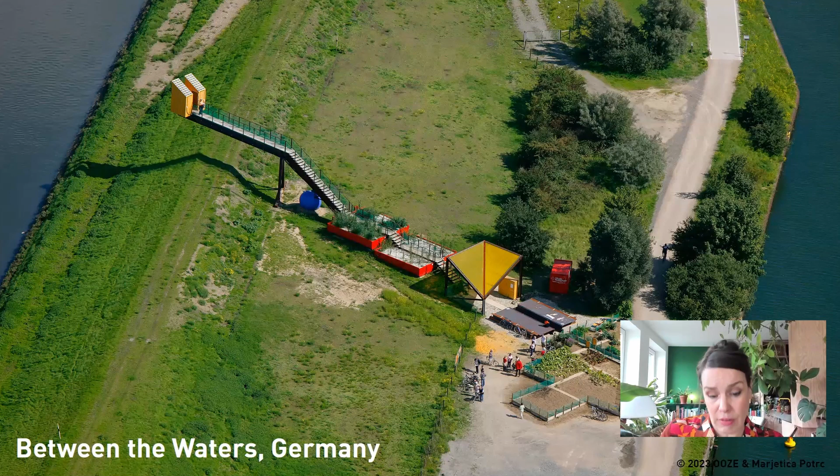And exposes all the elements needed in a diagrammatic way that is beautiful and understandable. We actually brewed beer from the wastewater treated with nature-based solutions, and created a place for the community to come together and enjoy.

And in London, we created, out of soil and water, the King's Cross Pond Club, which is the first public swimming pool without any chemicals, right in the center of the city, surrounded by 80 different wild plant species. 5,000 people signed a petition to keep it.

And you see in front of you here 30 individuals who wrote a letter to the local council committing themselves to actually care for the pool and run it at their own expense.

And now, of course, after this brief array of prototypes, the question is: how do we apply these concepts to a whole city?

I would like to share with you the case study that we're working on since 5 years in Chennai. It's called the City of a Thousand Tanks.

We work together with an amazing group of people, mainly from Chennai in India, a city of 7 million people, and from the Netherlands.

The Dutch government started a program led by the first water envoy, Henk Ovink, called Water as Leverage for Resilient Cities Asia, in 3 different cities in Asia: Chennai in India, Khulna in Bangladesh, and Semarang in Indonesia.

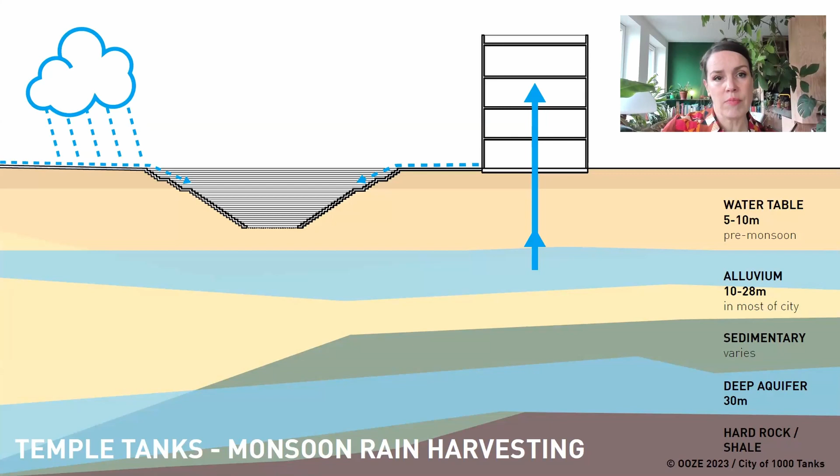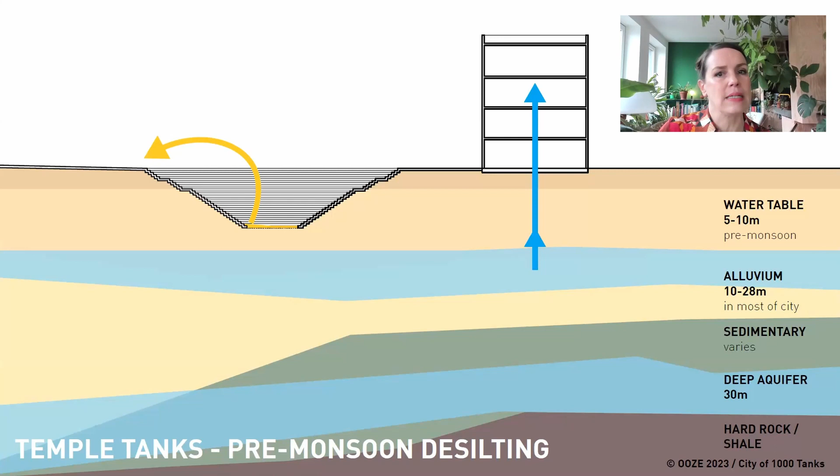So actually constructing places in the countryside, but also in the city, where this water can be absorbed and stored - which is what we call 'solutions in heritage,' which we found when we got into the theme. This here is almost like a temple tank in section - it's almost like an inverted pyramid. It's cut into the ground and allows all the rain water to flow into it, to be stored during the monsoon. Then slowly, over the course of 10 months, it infiltrates into the ground and can be brought up and used with individual bore wells. When it's empty, it can be desilted and cleaned. This has been in place for centuries, but now the system is broken.

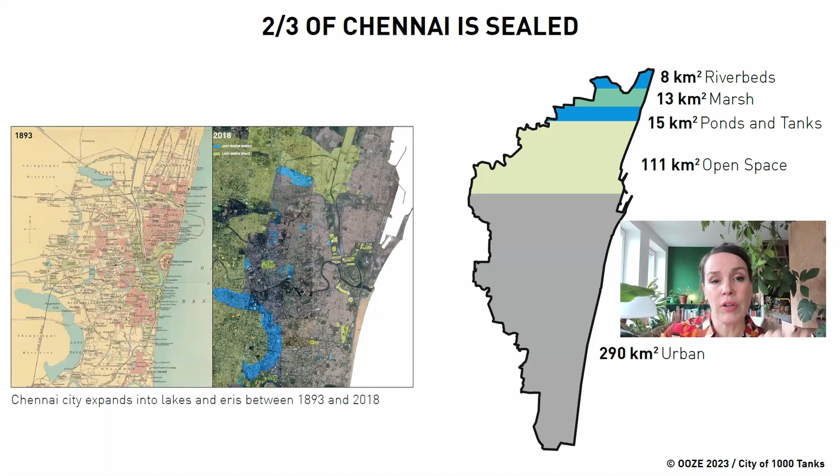We have a situation where we're floating in floods and fighting for drops in summer - so floods and droughts are disconnected in the city, showing how the city is broken. Although water is in principle abundant in Chennai, the demand is less than the total rainfall on the footprint of the city. But we can see that those tanks, and these eris - the lakes where water was stored - have been encroached by rapid city expansion with no understanding of these water bodies. Two-thirds of Chennai are sealed, so the ground cannot absorb. The temple tanks are staying empty - they have just a decorative function nowadays. And in this new context of climate change projections, where we have a rise of temperatures, less rainfall with more intensity, and sea level rise, all this is further exacerbated.

We also have, in water, greenhouse gas emissions from water sourcing. In 2018, there was such a drought that water had to be brought to the city by tanks - actually by lorries and by train. And from exposed sewage, you have methane emissions.

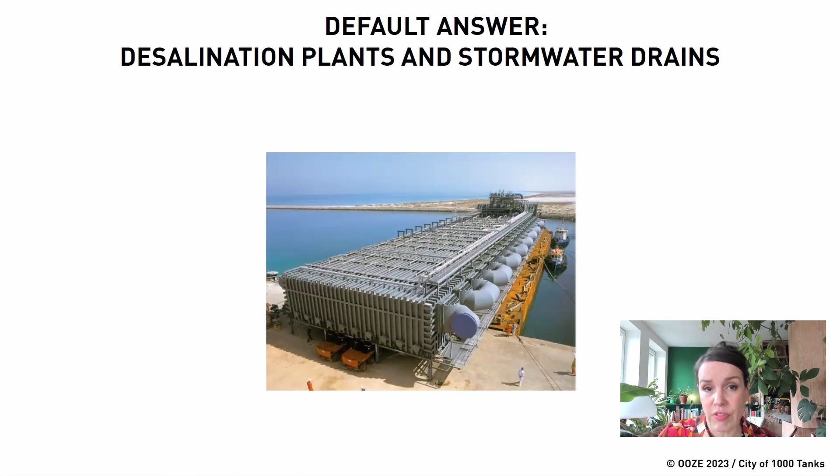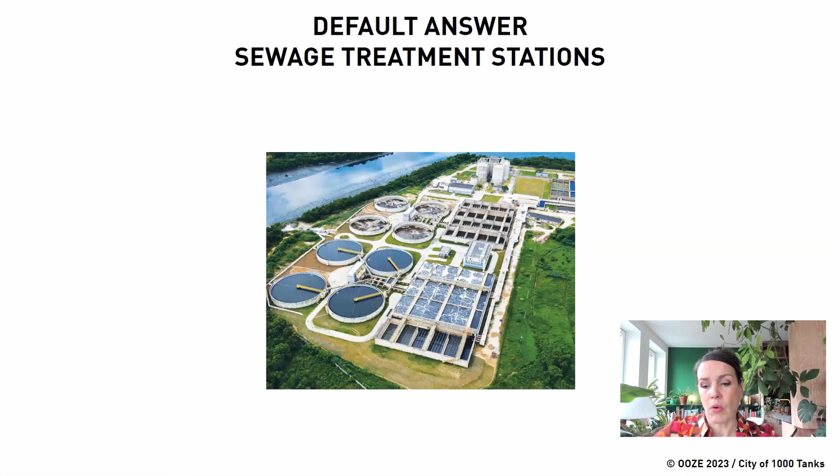Now, the default answer - and that brings me back to the theme of infrastructure and large mega projects, which we sign off so quickly with huge investments - the default answer to this drought and flood is desalination plants and stormwater drains. Stormwater drains take that water and bring it as quickly as possible out into the ocean, where it then has to be brought back by desalination plants, which take a lot of energy. And the default answer for pollution is sewage treatment stations outside our cities. These are just some examples of the grey infrastructure that runs through our city - and that's not only the case for Chennai, but for most of our cities worldwide. It's what we have constructed: a city that follows this model of creating externalities.

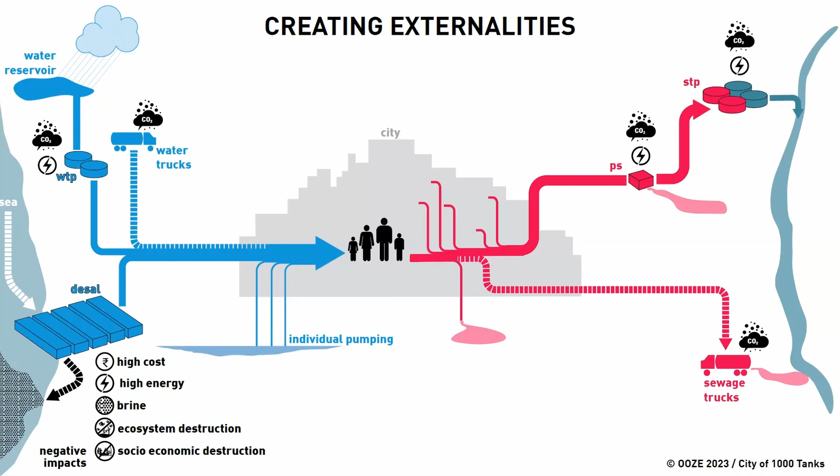It takes fresh water from one side and spills it out on the other side, sometimes and mostly untreated, with a lot of costs. So we take, and we throw it out. The question is: is a paradigm shift possible to a closed loop system, where we take what we use and give it back in the same way we received it? So the city starts to be a city that gives a service to itself by integrating nature-based solutions within itself. We can compare this system to the metabolism of the city, to the metabolism of our own body. The system that creates these externalities is actually akin to a body with all the organs placed outside. We can see very easily how that is inefficient, how that takes a lot of extra energy for transport, and how it would make so much more sense to integrate everything back into the body itself.

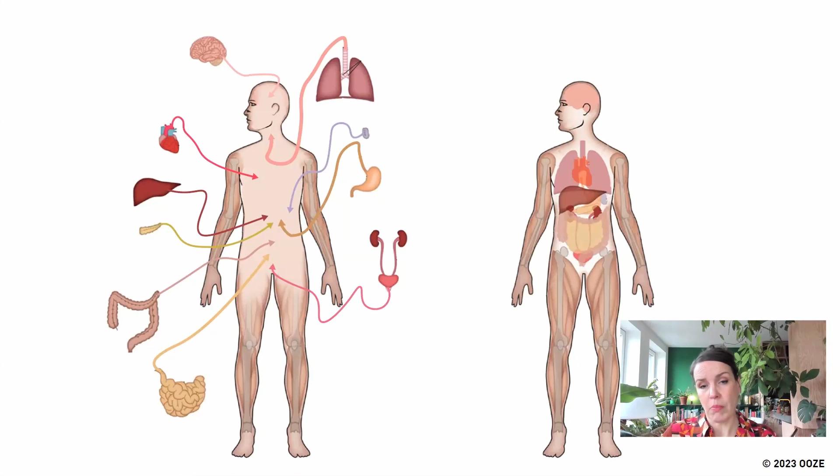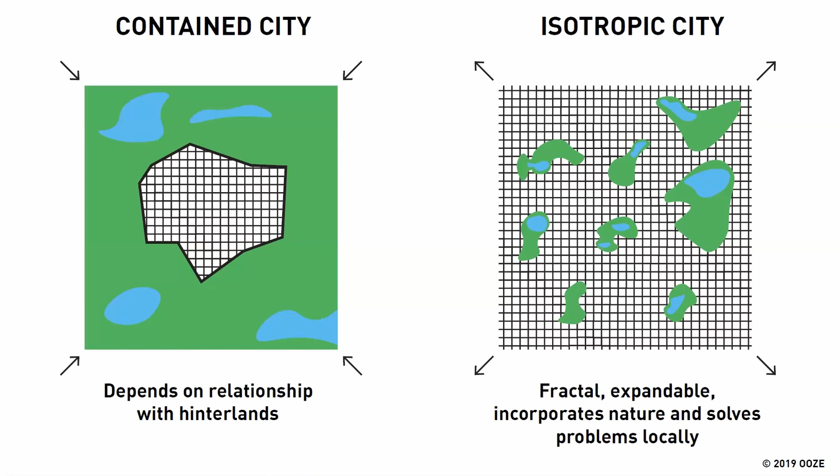In our work, we strive to go from what is traditionally the contained city that depends on the relationship with its hinterlands, to an isotropic city that's fractal and expandable, incorporates nature, and solves problems locally. We can do that with nature-based solutions.

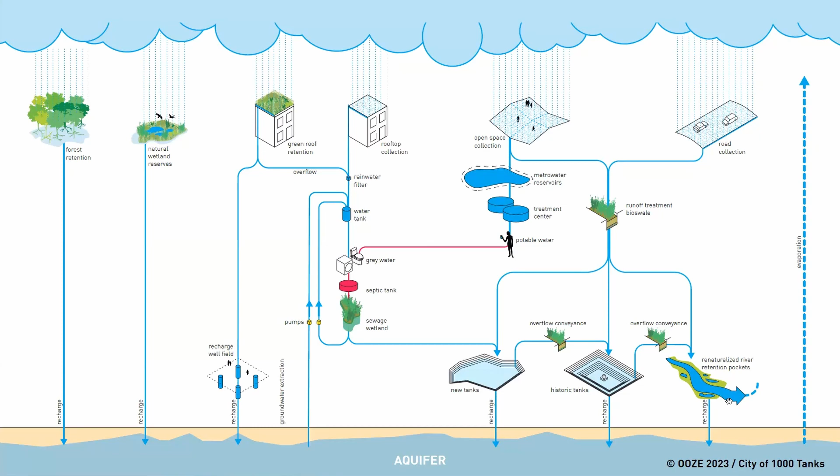This here is a sort of toolbox that we created. On the left side we see forest retention and natural wetland reserve - the most pure form of nature-based solutions, with the goal to recharge the groundwater, the aquifer. Then we see how those solutions can be brought into the city through green roofs, but also by creating temporary spaces for collection - squares in the city, or roads - where the water can be treated with bioswales, constructed wetlands, and different types of tanks: historic tanks, new tanks, and renaturalized river retention pockets. Here's a small comparison of what it takes to actually clean water in the southern hemisphere, where it's very warm in India, with a more or less constant temperature that's never below 20 degrees.

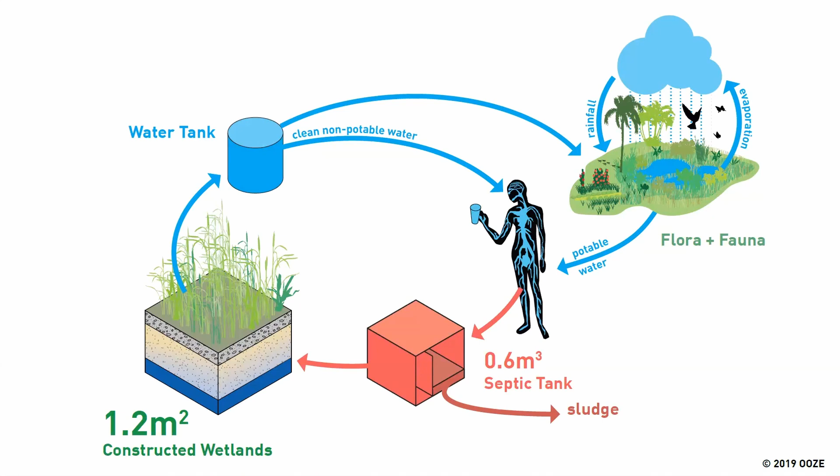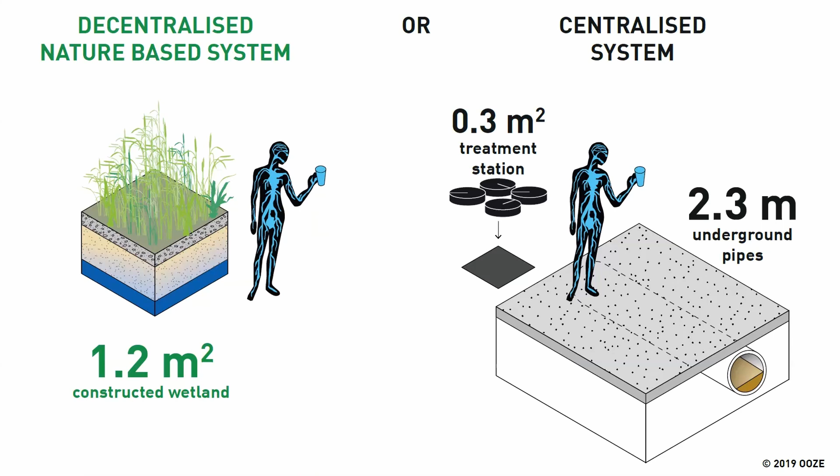It's about 1 square meter of constructed wetlands and half a cubic meter of a septic tank. When we compare this to traditional grey infrastructure, we see that it's not only perhaps less costly, but also much more attractive, and maybe more transparent about where the money is spent, because much of grey infrastructure is absolutely invisible. That invisibility draws with it a lot of other consequences, such as even corruption - we don't even see where the money is going.

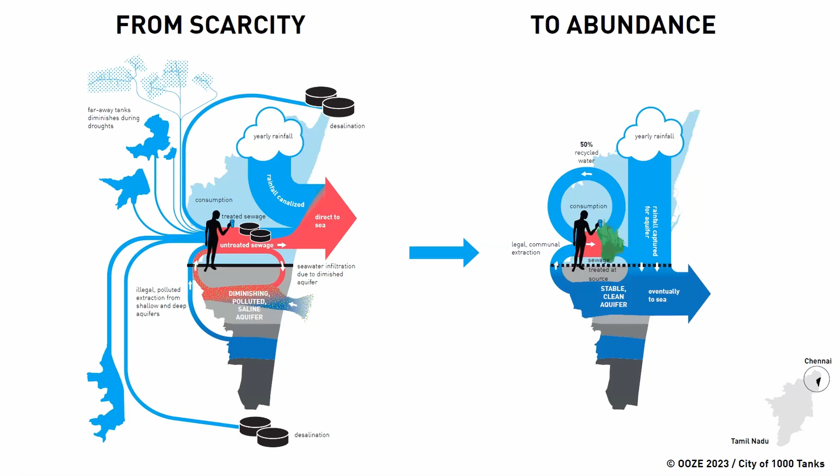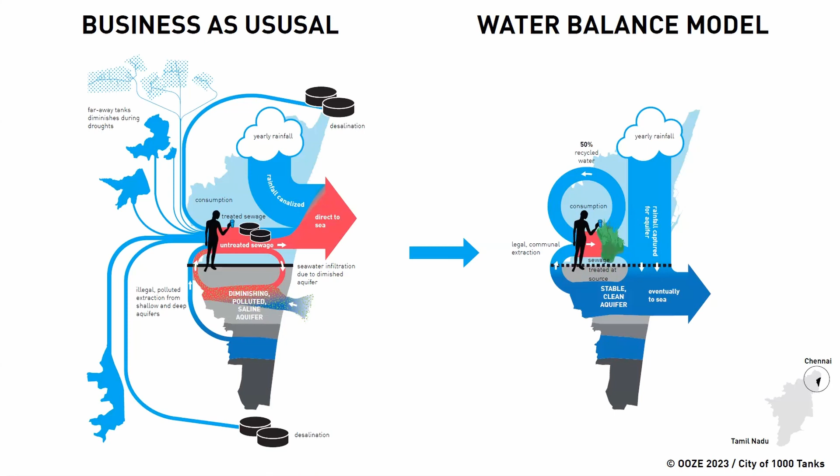In Chennai, we want to use these nature-based solutions to go from a situation of scarcity to a situation of abundance - from a business as usual where we draw water from very far away, lakes 200 kilometers away, and desalination plants, and expel it partly untreated into the sea, to a solution where we shrink our footprint by 50% by treating water right where it's produced with decentralized nature-based solutions and reusing it to keep the aquifer clean and stable, as well as all our natural water bodies.

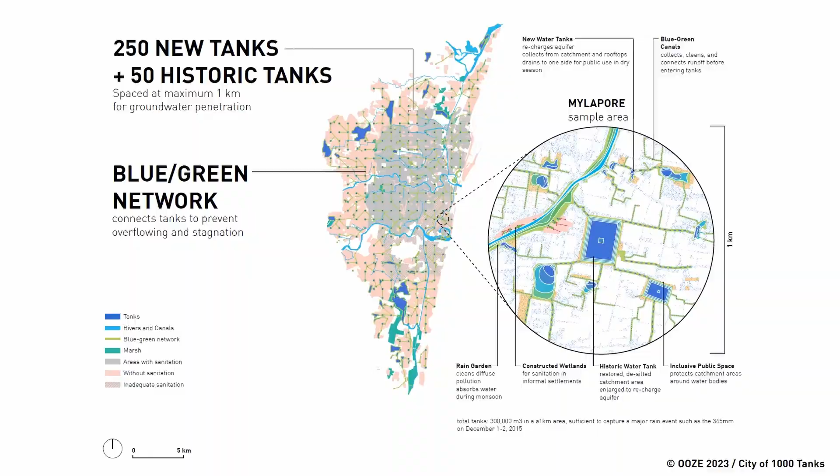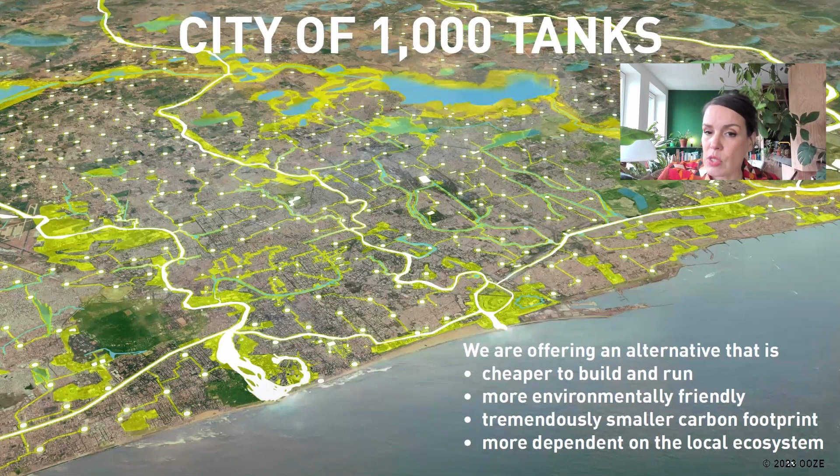With this background, we developed the idea of 1,000 tanks. That's not taken literally, but it looks at the city and how long it takes for rainwater to infiltrate, which is about 1 square kilometer during 1 year. So we want to construct, in each square kilometer, a number of tanks to reach a city of 1,000 tanks. That's cheaper to build and run, more environmentally friendly, has a tremendously smaller footprint, and is also more dependent on the very local ecosystem.

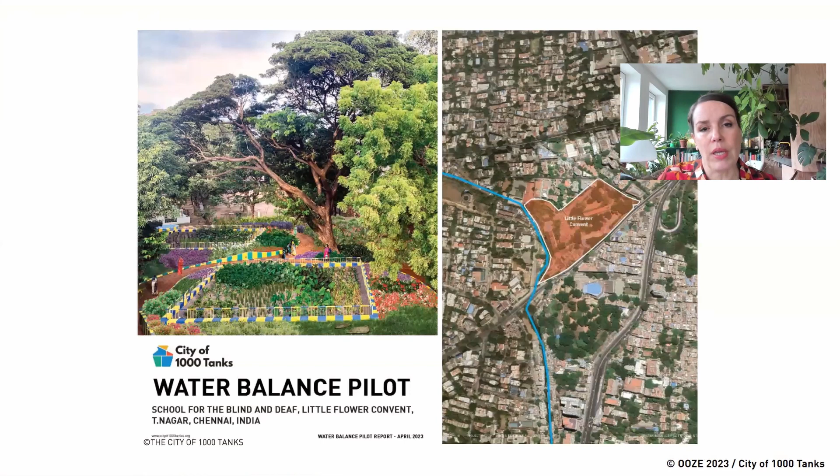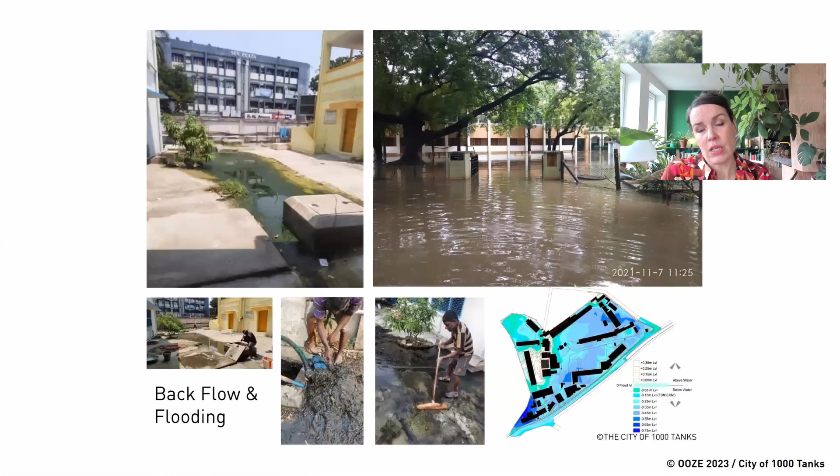We built a local prototype that was opened just 1 month ago in Chennai. It's called the Water Balance Pilot, in a school for blind and deaf children, around 4 hectares next to the Mambalam Canal. The school itself is like a microcosm of all the problems the city has with wastewater backflow and flooding.

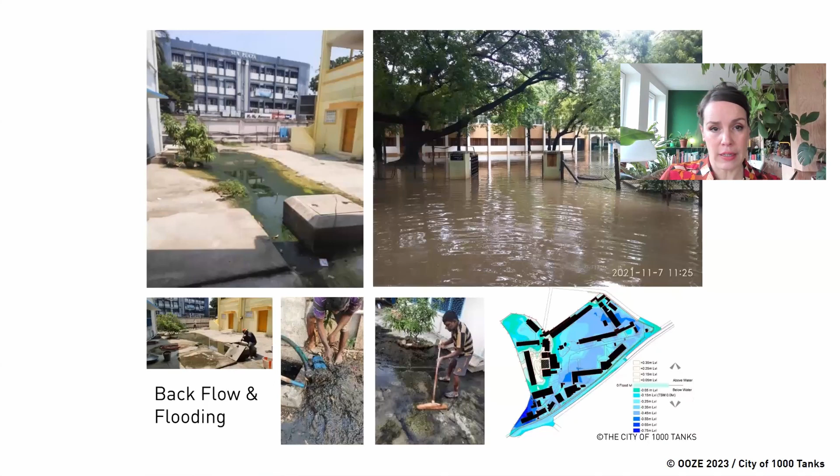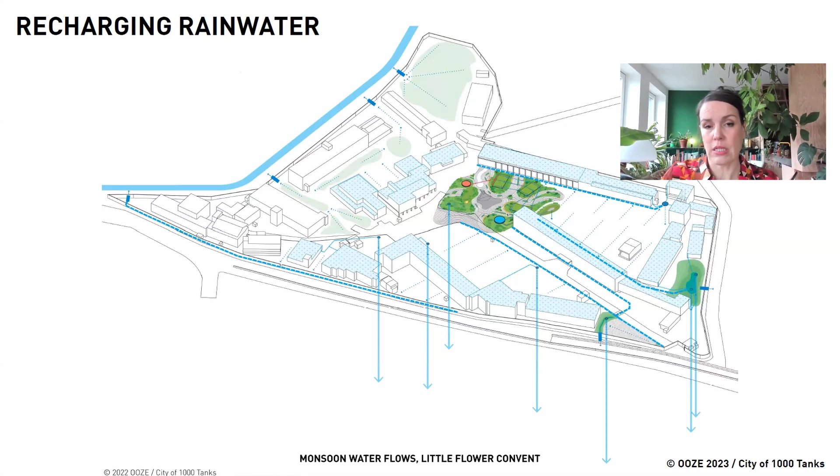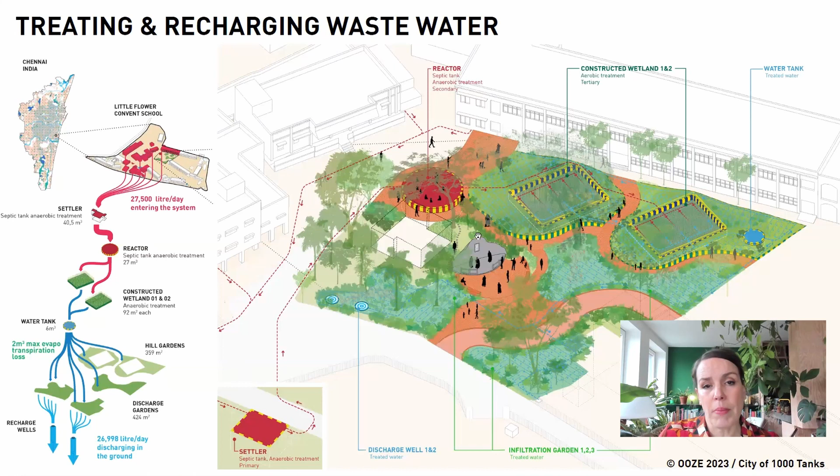So in terms of solutions, we have the recharging rainwater solutions with wells constructed in different positions, and we have treatment and recharging of wastewater. This is very innovative - we treat 27,000 liters per day of wastewater from the entire school, with an anaerobic system and an aerobic system, which I'll show next.

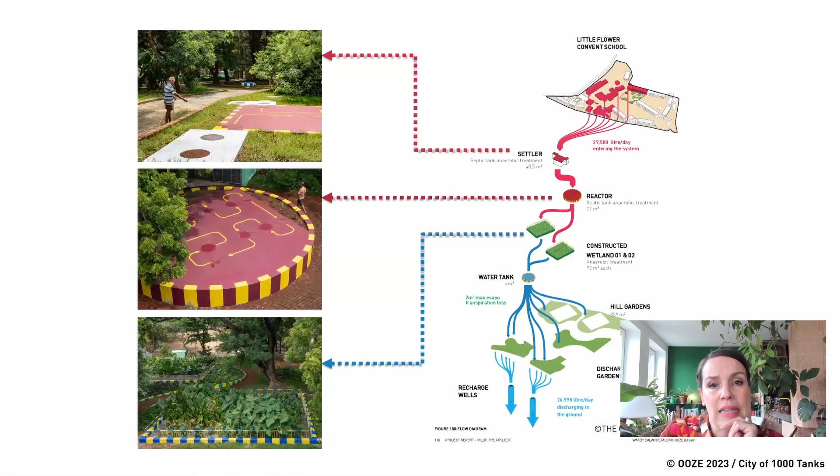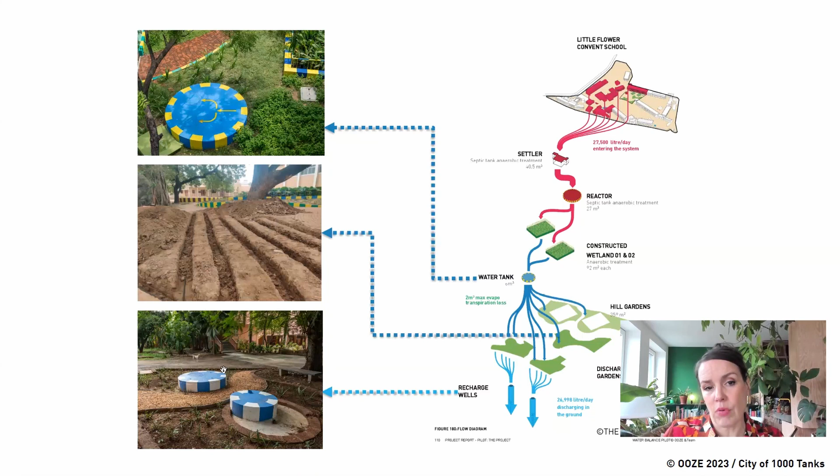The wastewater enters a settler and a septic tank, where bacteria that are in our body help treat the water without any oxygen or other chemicals involved. Then we have the constructed wetlands, 2 different fields of 72 square meters each. We have a tank, and a discharge system. You can see the grooves in the ground that help water a park in the center of the school, and the rainwater recharge wells.

Here you can see the final version that we opened 1 month ago. The whole park is enjoyed, and it's also a pedagogical tool that shows to city officials and users alike that these solutions are applicable to almost any context.

The reaction we got during the opening was, on the one hand, the usual stuff - it doesn't smell, it looks fantastic - but also that it's actually a sewage treatment plant is almost beyond belief. You can actually live next to it, and it's beautiful. It's a system where the plants themselves are irrigated by the pipes, so the water infiltrates the ground eventually. And the water tests we did turned out well.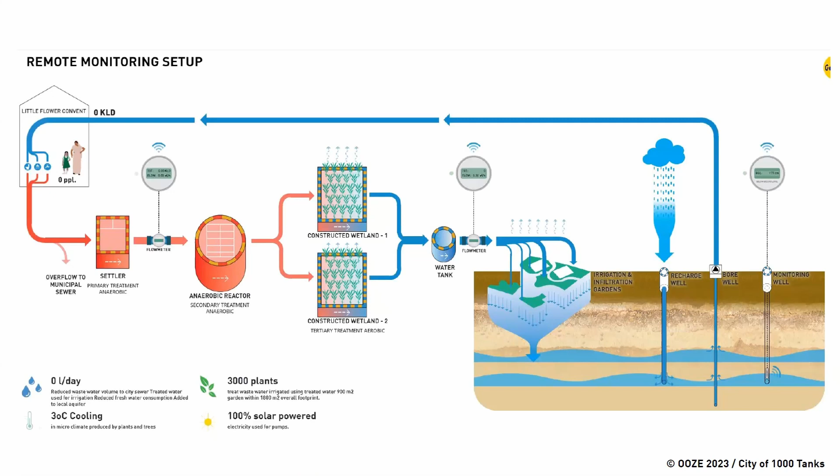Another innovative part here is having a remote monitoring setup, so everybody can see this on their phone. You can log in and see how much water is collected, how much water is treated, and how much water is infiltrated into the aquifer. This functions akin to a solar power remote monitoring system, and with it people can actually be incentivized.

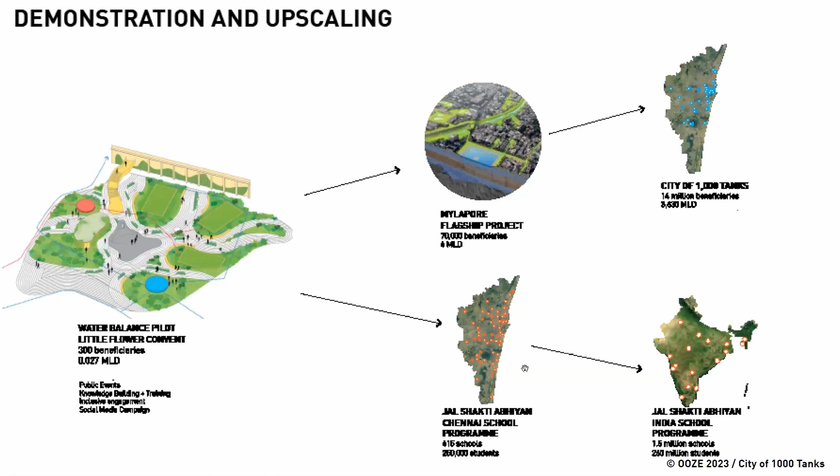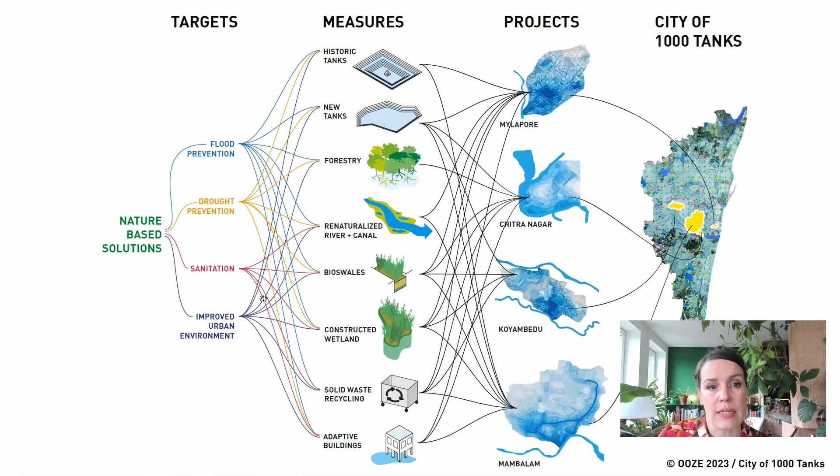So how do we go from this local prototype to a systemic upscaling? How can we go from a Water Balance Pilot to a flagship project in Mylapore to a whole city of 1,000 tanks, and also use it for upscaling through different schools in Chennai and in India? We look at 4 main targets: flood prevention, drought prevention, sanitation, and an improved urban environment.

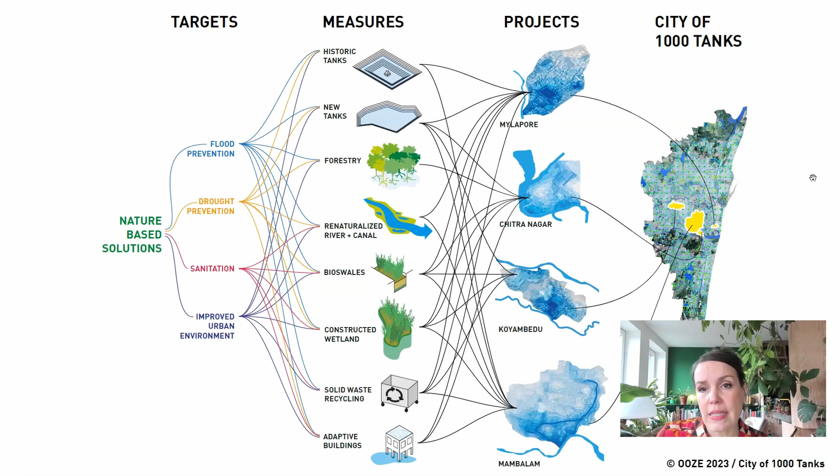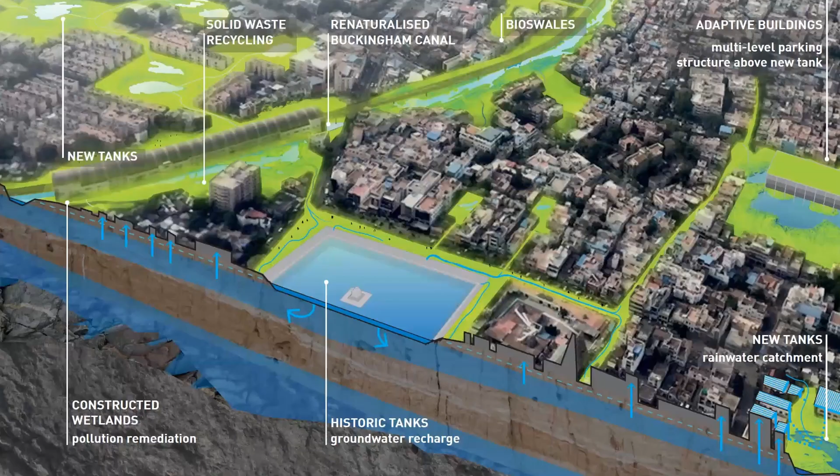And next to the measures, the nature-based solutions that I already explained, you have also solid waste recycling and adaptive buildings. We then apply them to 4 different watersheds in the city to contribute to the overall idea of the city of 1,000 tanks. I will now illustrate how this works in one flagship project in Mylapore, historically and culturally significant core of the city, and how it looks when we apply those different nature-based solutions.

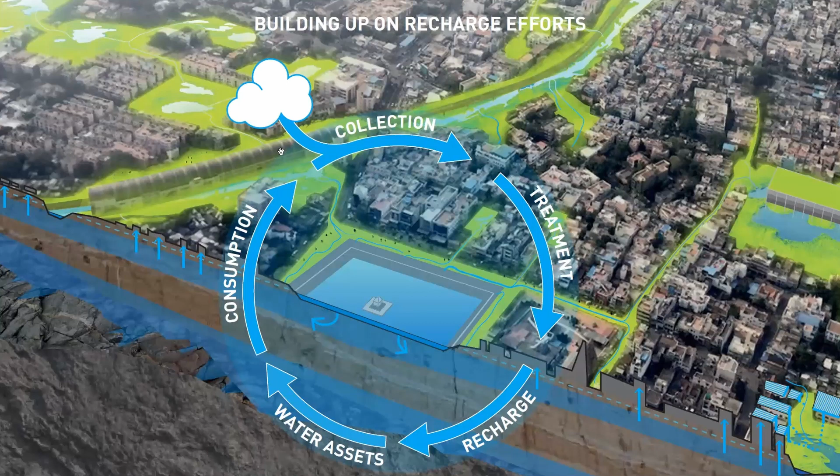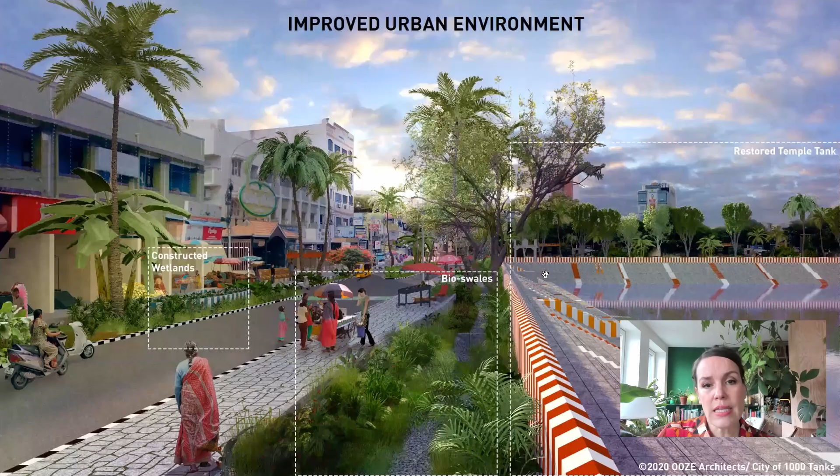And we see the city not only as a surface, but actually as a section, as a cut. And we think about what's underneath the city when we design, redesign, and actually repair the city. So from rainwater collection to treatment, to recharge, to construct water assets under the ground, to consumption, to bring it up with water treatment plants locally, we close the cycle. This leads to an improved urban environment around the temple, and it leads to a restored temple tank that can collect water.

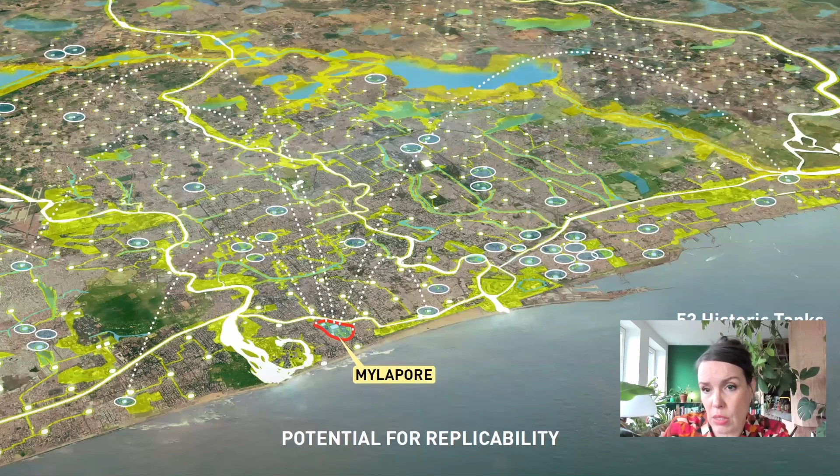And it has a large potential for replicability. We see here 53 historic tanks with the same solution, with 1 million beneficiaries, with overall a 50 million liter per day possibility to recharge. This is calculated over the whole year, of course.

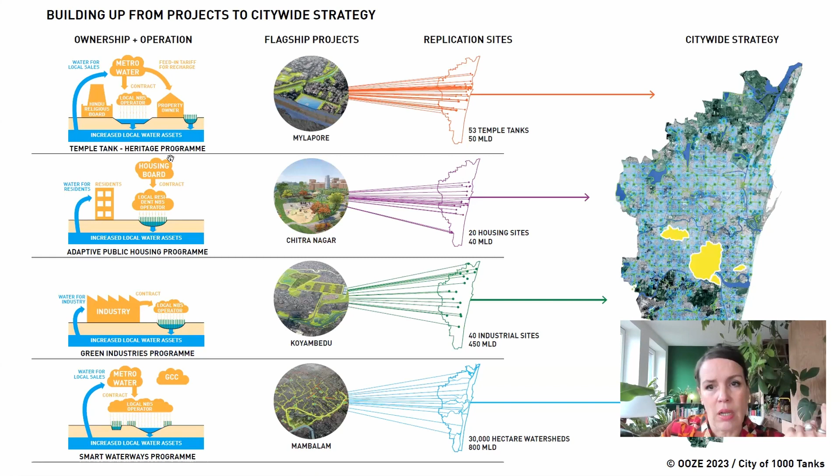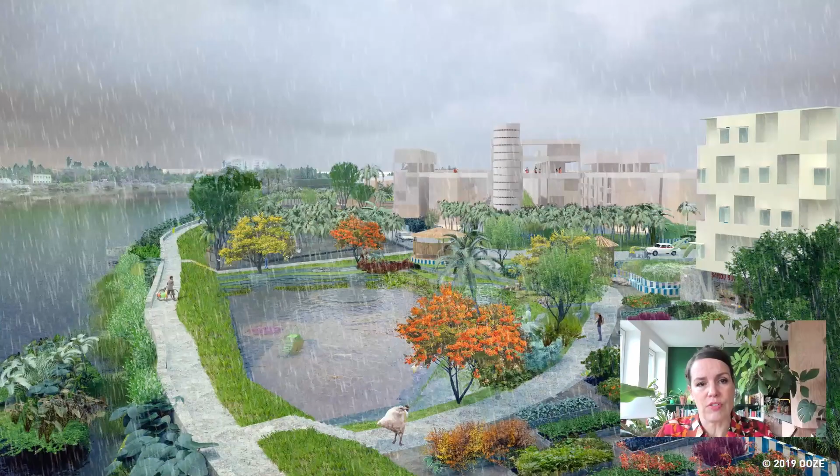And now we see here the different models. So we have housing sites, we have 40 industrial sites, we have different types of canals and watersheds. And with each type of project comes also a different ownership and operation model. We see here, for instance, the housing where we constructed not, of course, like a temple tank, but a sort of a deeper playground that functions as a tank that can be filled during the monsoon and serve as this local water body. So we see this sort of dynamic temporary landscape in the city.

And how do we upscale in time, which is so important? How do we get this sort of vision into the future, to get from where we are now, from a pre-feasibility and feasibility with exactly these prototypes and pilots, to construct these flagships and the pioneers, and to become eventually a city norm? So we do this by what we call the project program approach, where everything we do along the way is actually feeding back into the overall program of the city of 1,000 tanks. So we construct several feedback loop moments.

And now I would like to illustrate a little bit the benefits for the collective future of these nature-based solutions. We have, of course, the SDGs, the Sustainable Development Goals, that touch so much more than just water itself. We have social benefits. We have benefits that are economic, that are also for street vendors, that can be engaged in job creation, in the maintenance of the system. And we have a gender-sensitive development.

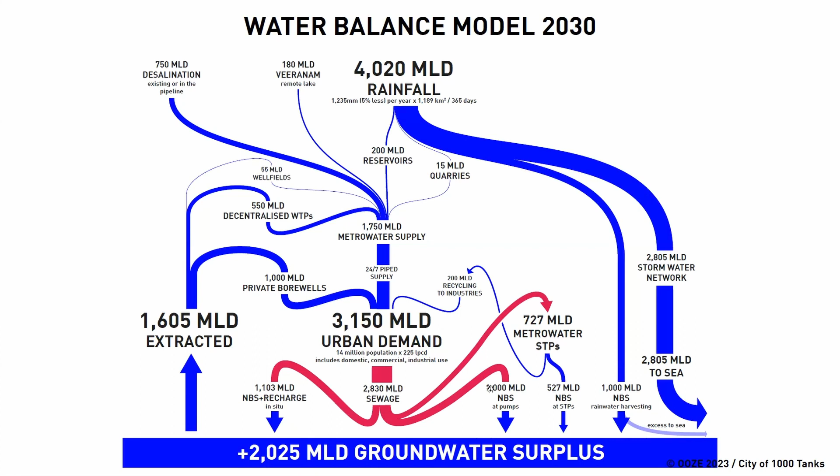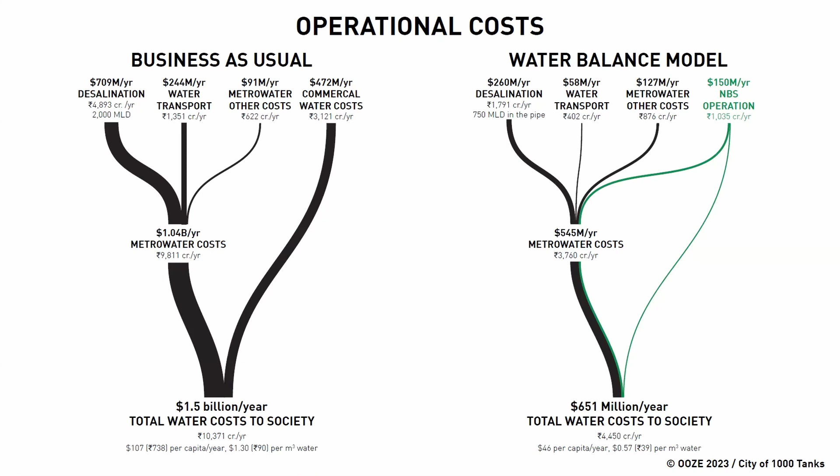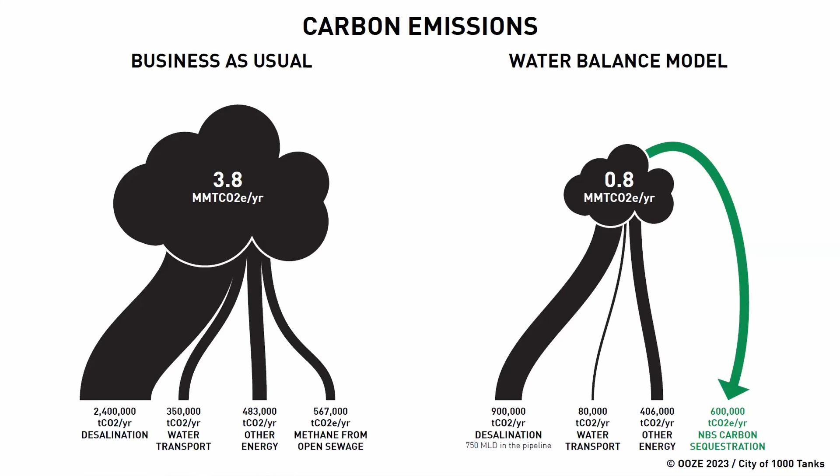We can compare operational costs that are, of course, better with a system that involves nature, because nature, as it were, does all these treatments for free. We just need to give it space in the city. We look at decreased carbon emissions with the water balance model for the same reason. The plants, when they grow, they sequester carbon.

Now I want to show the comeback to Future Island that we saw in the beginning, where we constructed an experimental landscape. That is another type of prototype. It's a conversation piece for a collective future. Future Island is our first permanent artwork that we designed together with Marjetica Potrč, an artist with whom we've collaborated on these projects for 15 years.

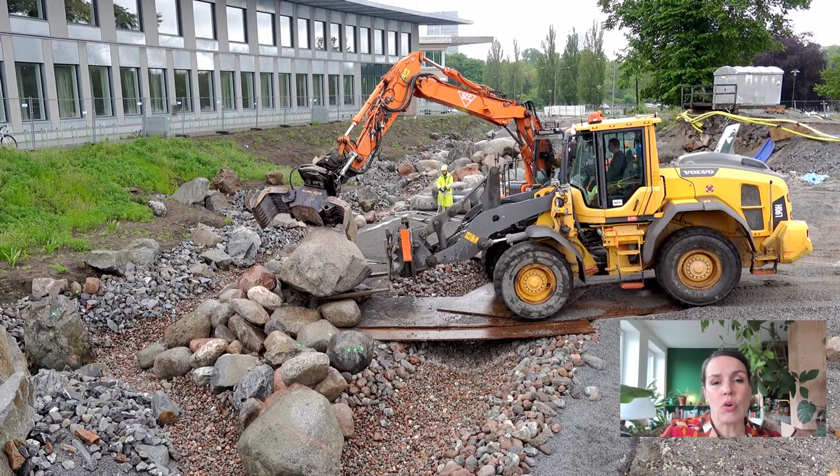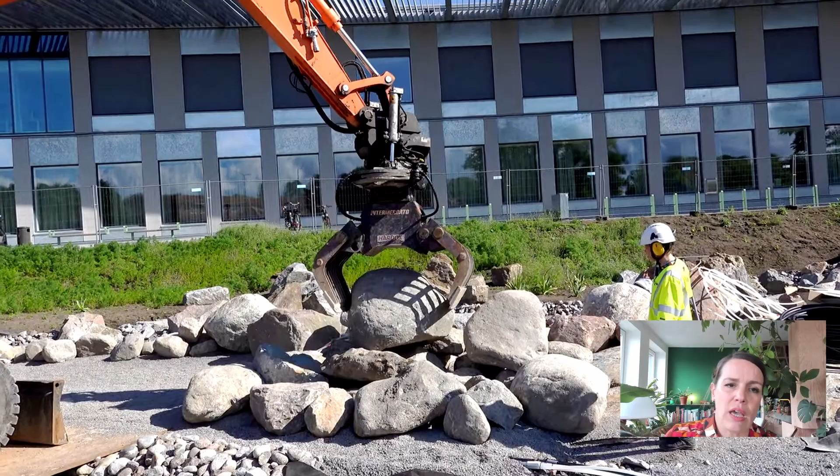We were invited by curator Lotta Mossum from the State Art Agency in Sweden, for Akademiska Hus, a state developer in Stockholm, to construct an artwork that will be situated in the landscape of a newly constructed campus, the Albano campus in the north of Stockholm. And when we arrived 7 years ago, this is what we found: an amazing heap of granite rock. And we were immediately captivated by it.

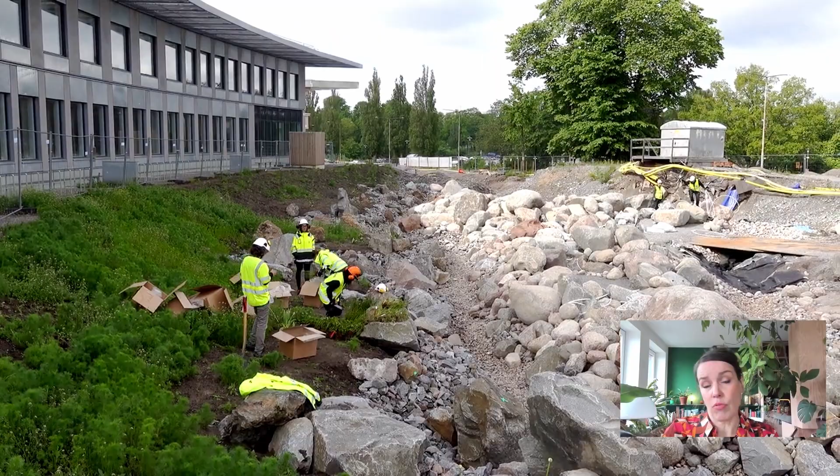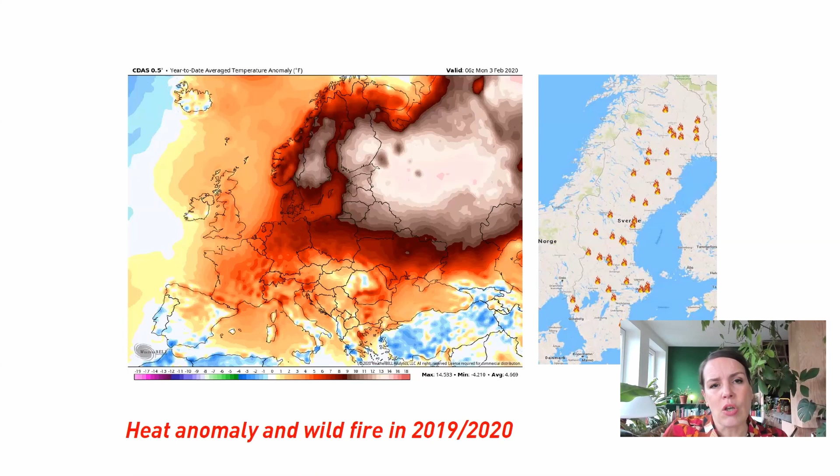The rock, like the rock in Sweden, is one of the oldest rocks on the planet at 1.8 billion years old. It sort of clashes with our reality right now, which is climate change, where predictions for the north of Europe are much harsher than anywhere else. So we brought the two together, and in this new landscape we constructed an island made of these rocks that were put aside, stored for us, and we could bring them back. Then we drilled half of the rocks to construct an island where half is 5 degrees warmer than the other side.

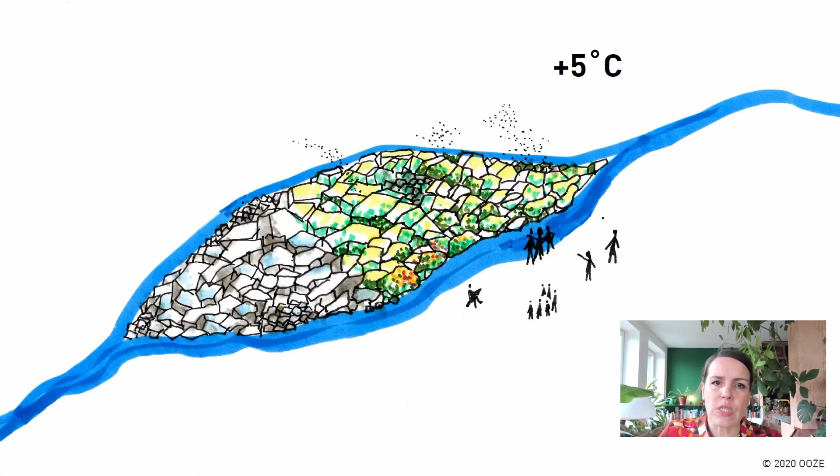So somehow the future that is possible in the do-nothing scenario, and the future that we hold in our hands to keep temperatures close to what they are right now, are actually side by side. We heat part of the island, the north part, to +5 degrees. We do that with a heating system under the ground—in some parts of Sweden, streets are actually heated, so it's similar to that.

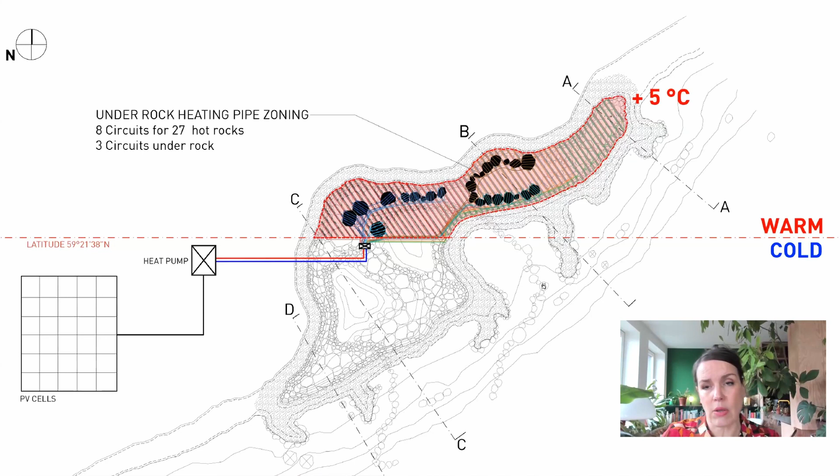And then some clusters of rocks are also drilled. They're connected to a heat pump, which is connected to photovoltaic cells on the roof of the campus. And so here are some...

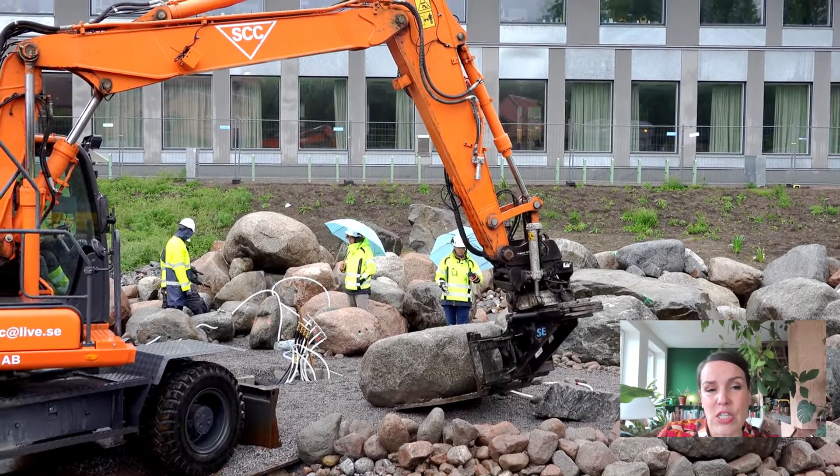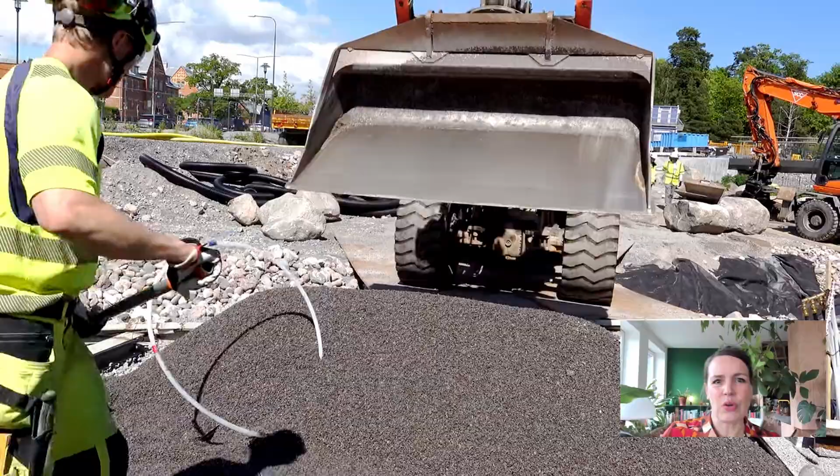Parts of the construction where you see that this landscape, which right now looks as if it's always been there, was actually constructed back stone by stone with the help of an amazing team of contractors that with their skills helped us understand how to reconstruct nature with rocks that are 10 tons each. It took many weeks, and every stone you see here has been touched and deliberately placed. You see here the rocks that have been drilled, connected with insulated pipes.

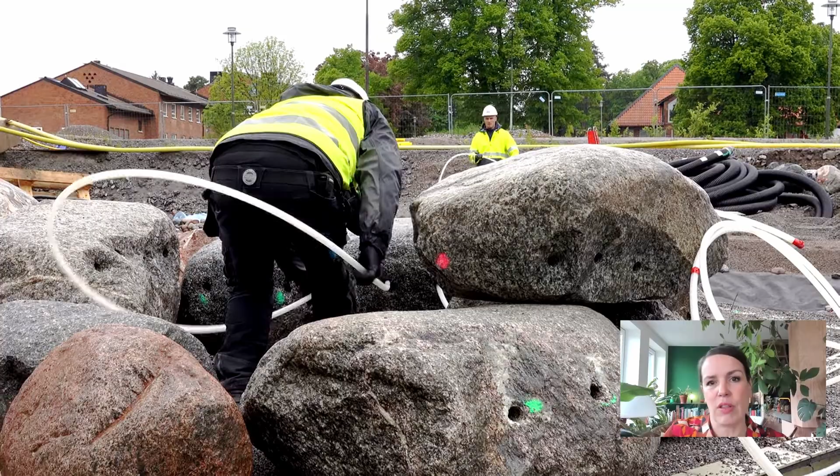So then they become warm to the touch, and they will gradually heat up the environment. The island sort of comes back—it's almost like a relic of an ancient time found there. And over the next 100 years, we will see how these different futures evolve side by side.

We planted, with scientists from Stockholm University, the same type of species everywhere on the island. We have mosses and lichens that are 500 million years old already as a species, of course. We will now observe with the Science House how this evolves in the near future. So it's a sort of conversation piece—people can imagine a different future, they can touch it, they can feel it.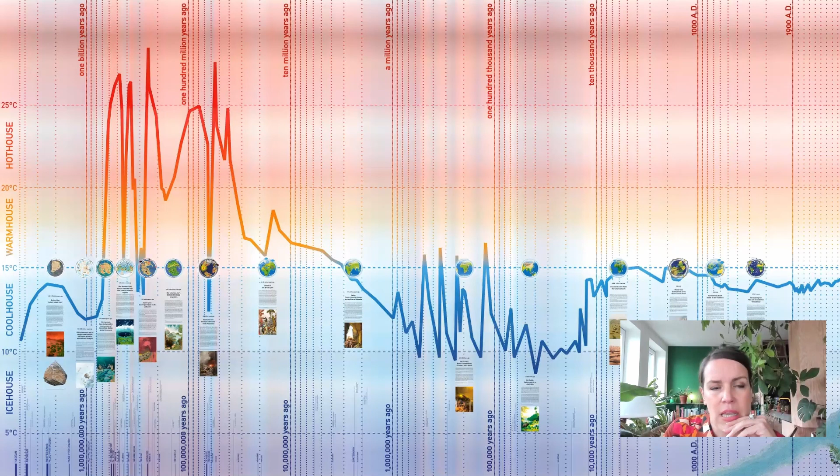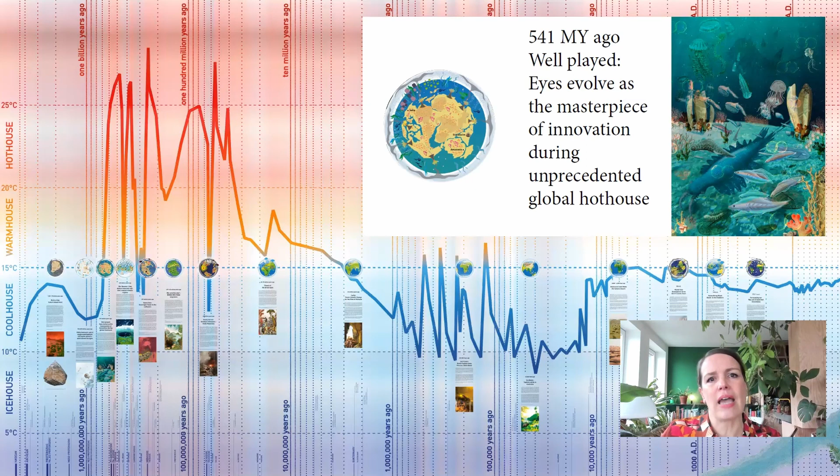On the left you see the beginnings, 4.5 billion years ago. Earth has been many times hotter than now—5 mass extinctions, 5 catastrophes so far. When you get into this theme, you understand that the planet will always be here somehow. What will change is the species. With each mass extinction, species disappear, other species come up, they adapt. So adaptation is not something passive, but actually an active creation that we now also have to engage with, as we've used fire on a daily basis during the last 200,000 years.

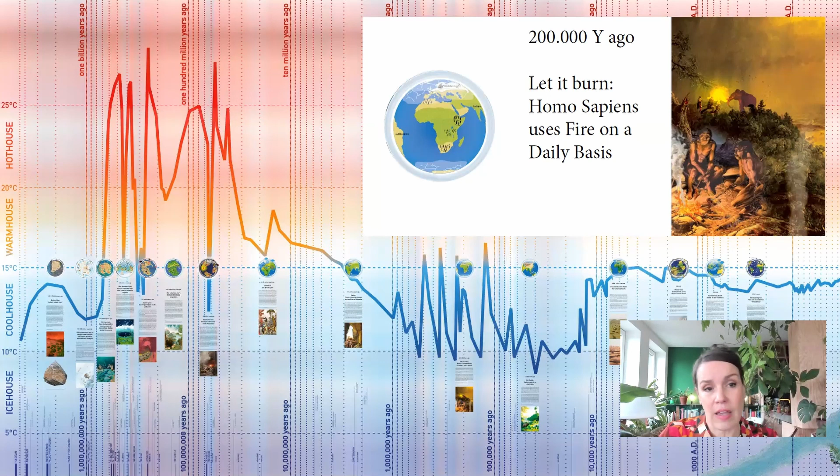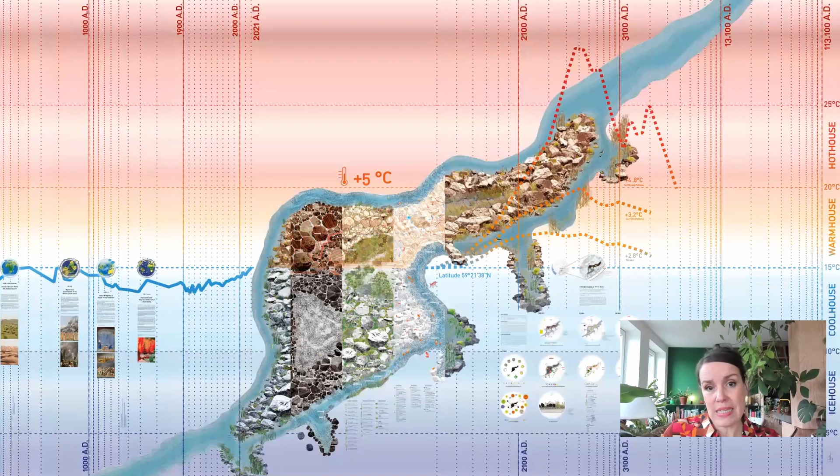That's exactly where we have to adapt and say that's actually stupid, because other species on the planet have used photosynthesis for 2 billion years to get by. So there are many aspects we can learn from looking back in history, how other species were able to adapt, and how we can turn our economic system around—instead of trampling nature with our feet and always leaving it at the bottom of the pyramid, to cherish it and have nature as the main stakeholder.

We have to help. This is constructing the only future that is possible, because as Johan Rockström put it, we have to be nature positive. If we live in a world with a hotter climate, with less capacity of nature, more pollution, less water, it won't be possible to deal with it. So I hope that in this way we can stay agents, and as designers and urbanists, we can become agents in helping to construct this new alternative future.